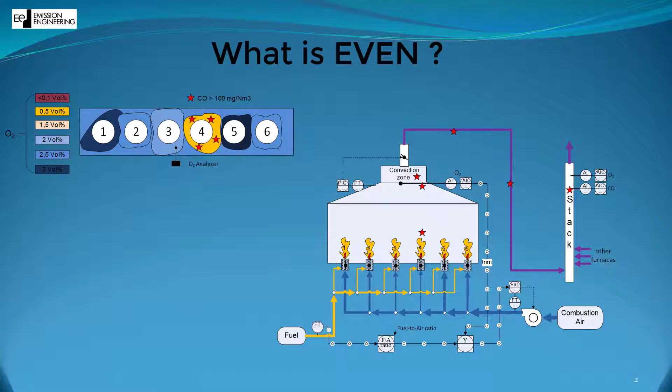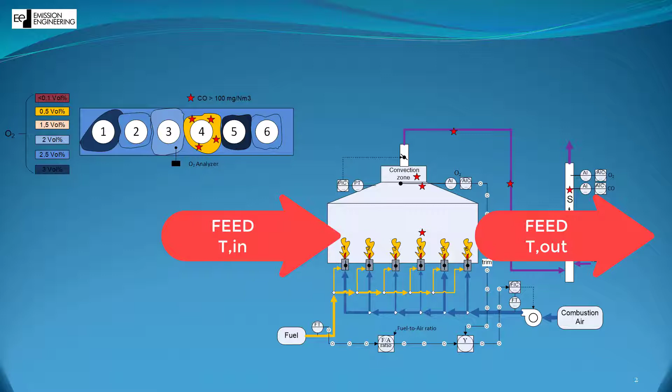The major objective in oil refinery fired heaters is to heat up a feed stream till a desired outlet temperature for a downstream process, which can be a distillation tower, a reactor, or other equipment. The more uniform heating inside the firebox occurs, the better for the process, and the fewer operating problems will occur.

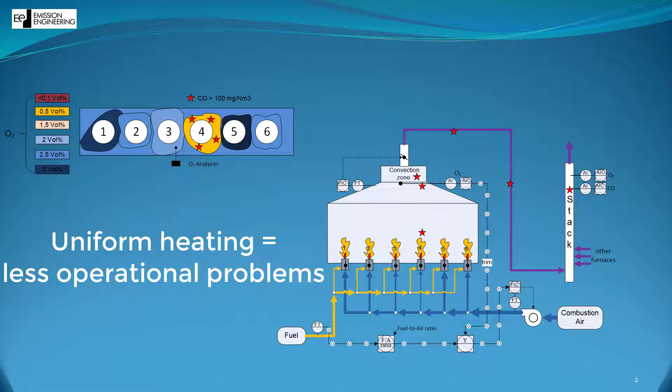Furnace manufacturers design the firebox, and as a result, the number of burners and the heat release per burner is determined. It is the desire not only of furnace manufacturers, but also of those that run furnaces, that the flue gas temperature of each burner is the same, because then the heat transfer to the tubes is even.

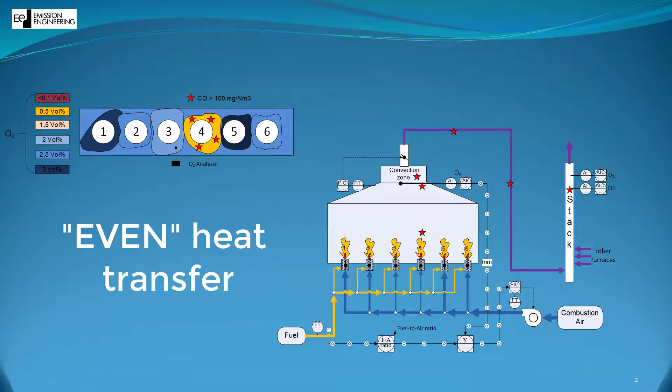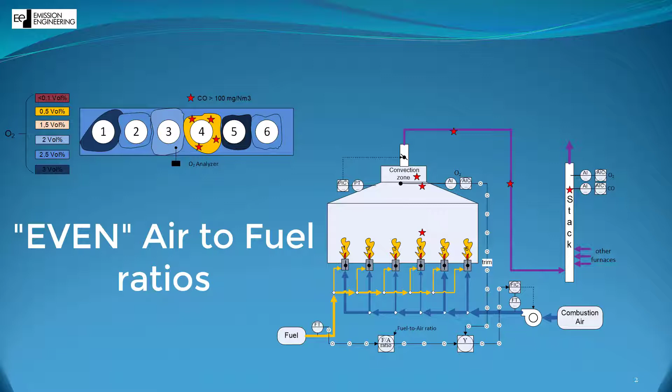But uniform flue gas temperature requires uniform air-to-fuel ratio in all burners. So far the theory. To achieve this in practice means one needs to overcome several problems. Whereas fuel distribution is normally not an obstacle, a highly underestimated reason for non-uniform temperature profiles and heat flux inside the firebox is non-uniform air-to-fuel ratios.

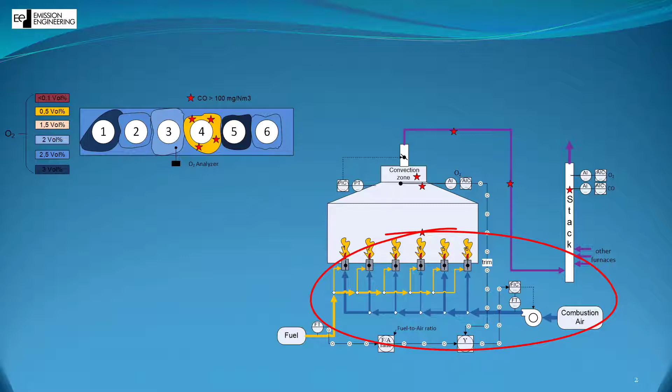On a system with forced draft burners, like here on the slide, the combustion air very often distributes non-uniformly throughout the combustion air ductwork. A major problem is that the distribution is not even measured at all.

On systems with natural draft burners, where there is no air ductwork, one has the same problem of adjusting each burner air damper in such a way that the air-to-fuel ratio is the same in each burner.

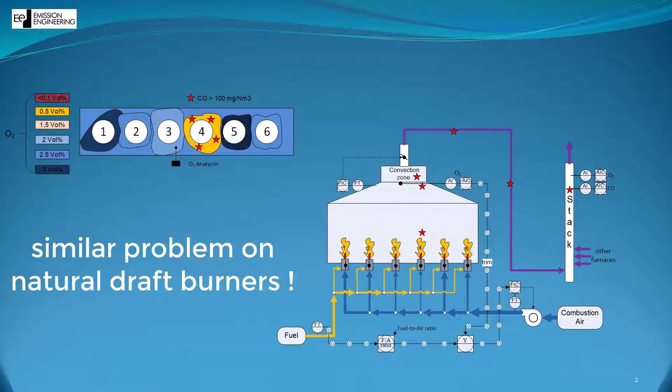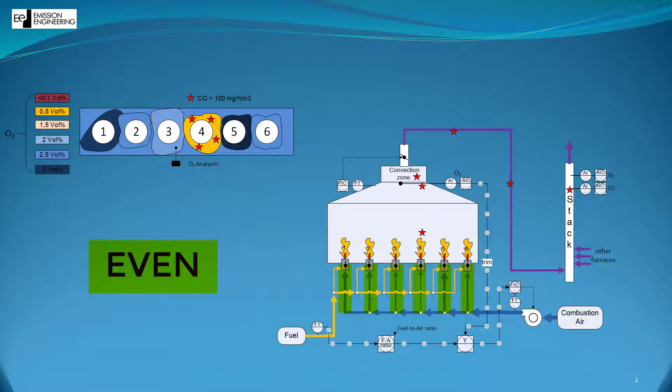EVEN is the solution for overcoming all these problems, because the furnace optimizing tool indirectly measures the airflow to each burner by measuring and displaying the pressure drop caused by the airflow through each burner throat. Like this, the operator can instantly see how the airflow to each burner is.

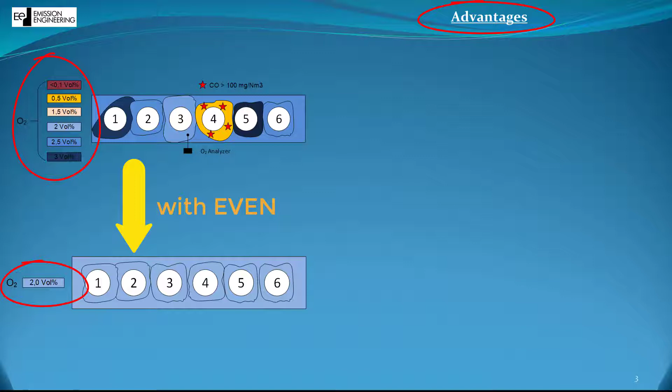The main advantages of being able to measure and correct the fuel-air ratios more accurately are: 1. Less internal and external coke formation of the feed tubes and less tube wearing. 2. More even flame shape among all burners.

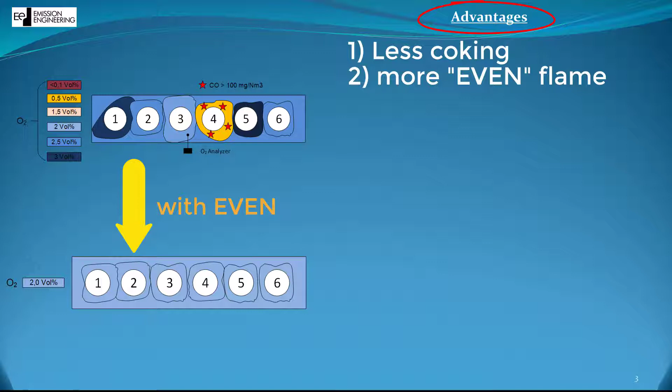3. Safer operation, compliance with the safety norms DIN EN 746-2 and API 535 and 556. DIN 746-2, for example, requires the air-to-fuel ratio in every burner to be within a certain envelope, something that most fired heaters do not comply with at all.

4. More even heating resulting in fewer hotspots. And 5. More even feed outlet temperature in each feed pass. And 6. More even flue gas temperature and oxygen content of each burner.

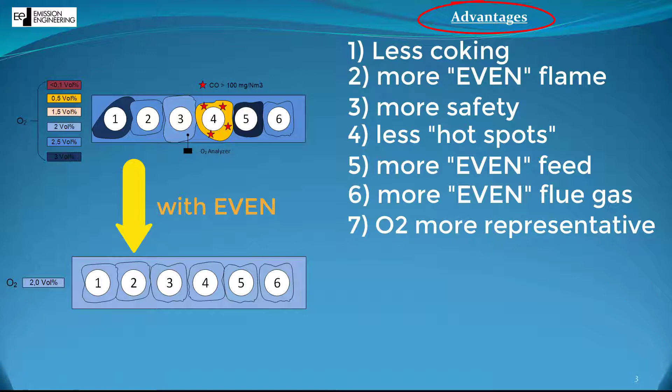7. Oxygen analyzers measure more representatively. 8. Easier control of emissions, specifically NOx. 9. Fewer problems with flame instability of individual burners, as all can be operated in the same air-to-fuel envelope.

10. Easier to adjust the furnace for the operators, as there is a measurable criteria instead of simply judging the flame shape based on experience and visible appearance. Besides, that leads to time savings for operators.

11. Burner airflow can also be adjusted during startup of the heater, leading to safer and more controlled conditions during that phase, when the DCS has not yet taken over control mechanisms.

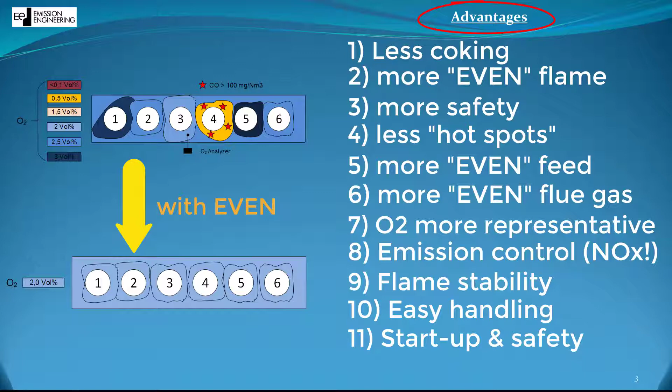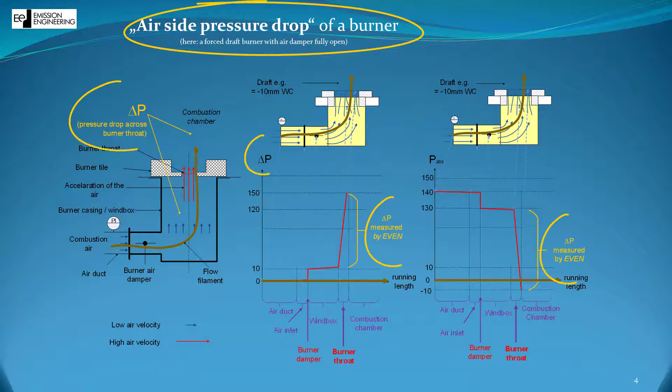What is actually measured with EVEN? EVEN measures the pressure drop of combustion air through each individual burner throat. Like this, burners that are operating with the same heat release are easily operable at the same air-to-fuel ratio. But not only that—also if the burners are firing at different heat releases, this is possible.

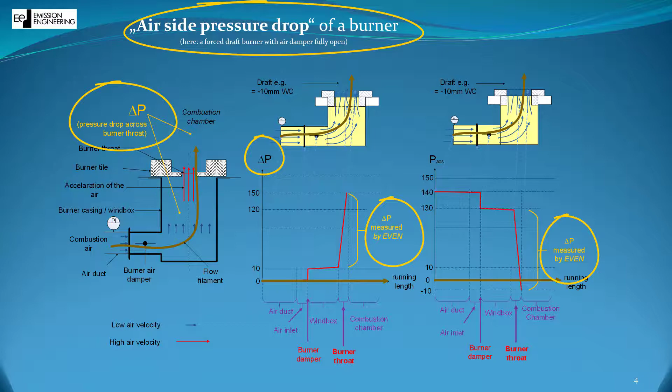Besides the mentioned technical advantages, there are of course economical ones, and they can be impressive. Of course, potential savings depend on the size of the refinery, concerning the heat release to all furnaces, and the real average oxygen content in the flue gas.

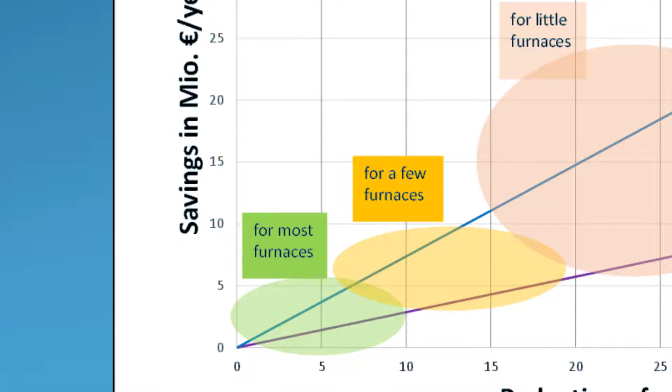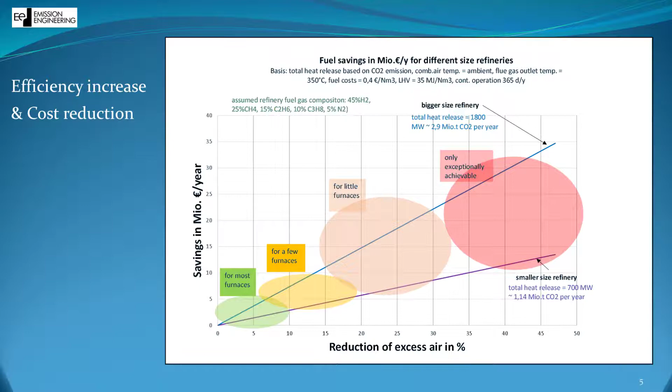Considering that fuel costs are quite significant in the process of processing crude oil and the resulting products, the return on investment in this area is very quick, because our tool can be implemented easily.

Finally, a few last words about the hardware used by our optimizing tool EVEN. We have developed different versions. Version 1 is a totally non-electrical pressure drop measurement device. It can be applied in non-classified areas as well as in explosion areas. It is very inexpensive, but has the disadvantage that the pressure drop is accessible only locally at the furnace.

The delivery time is approximately 2 to 3 months. Version 2 works with a pressure differential transmitter and is used by us when we travel on site for temporary measurements. Version 3 has transmitters, a PLC designed for safe area, and a human-machine interface, normally located near the furnace, and can be delivered for explosion-proof areas.

Via interface it can be linked to the DCS. This version is for permanent implementation. Delivery time is 4 to 5 months.

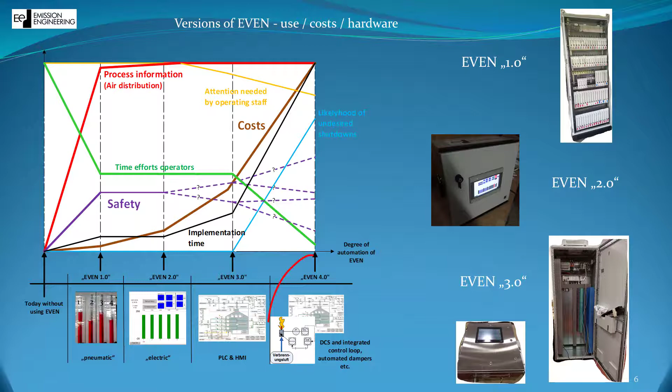Finally, version 4 is similar to version 3, but it automatically controls each burner air damper based on pressure drop. That requires control dampers, actuators, positioners, etc. on each burner and each air damper.

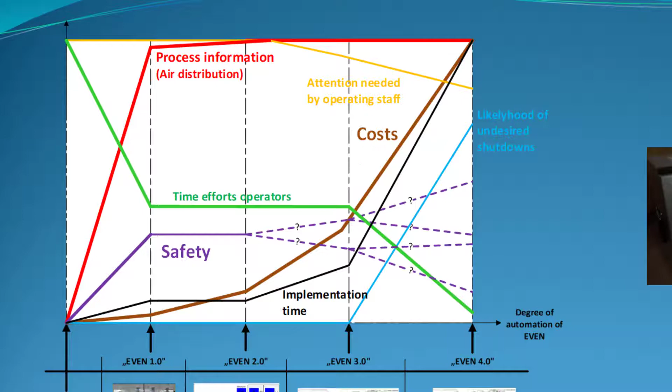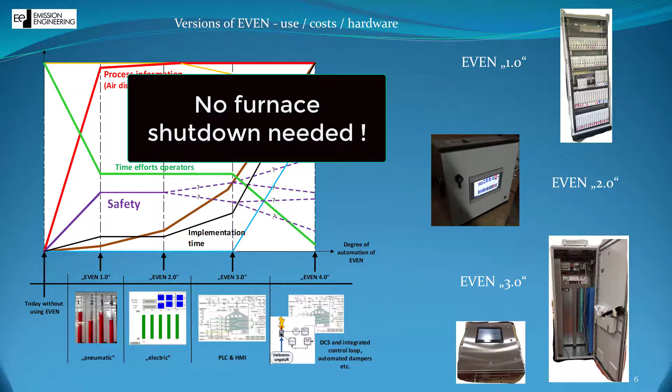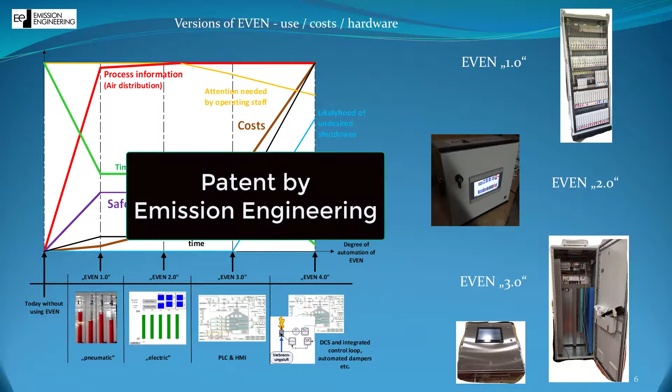The cost of this version is significantly higher than the cost of version 3, and even more so compared to version 1 or 2. All versions of EVEN can be instantly applied to a running heater without the need for a furnace shutdown. The return on investment is so great that EVEN pays for itself in less than 2 to 4 months. The furnace optimizing tool EVEN is patented by Emission Engineering.